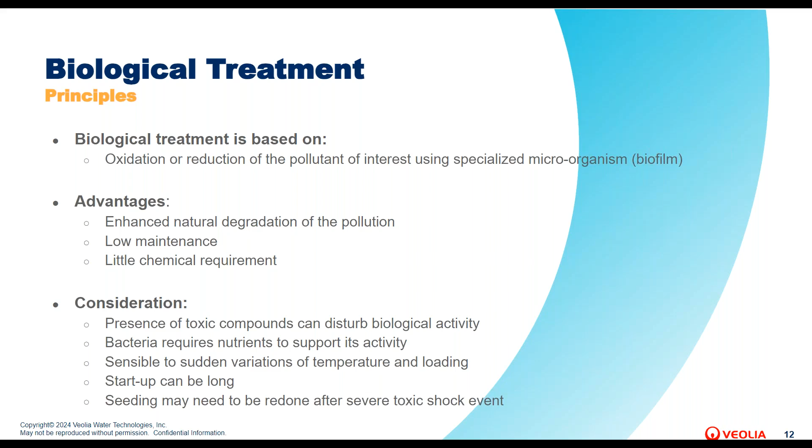There are several types of biological treatment. The most common being the activated sludge, where the biomass is in suspension in the water. These are the ones that we usually see in municipal application.

However, this presentation will cover the fixed film biomass in a moving bed biofilm reactor, or also called MBBR, where the biomass grows on carriers called media. So this process will rely on mixing to control the biomass in the system.

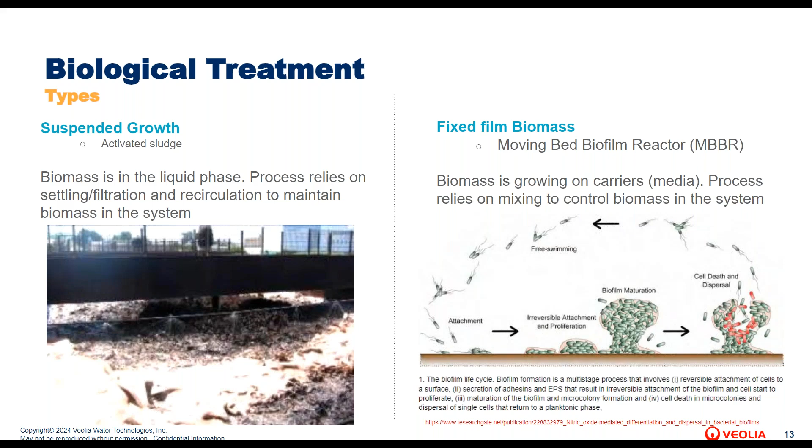Densification is a popular topic nowadays. The MBBR is a means of densification of the microorganism community into protected surfaces. It is like a safe space condo for bacteria in order to increase the population in smaller volume. This allows better tolerance on isolated toxicity events. It can tolerate also high hydraulic flow variation and TSS in the influent.

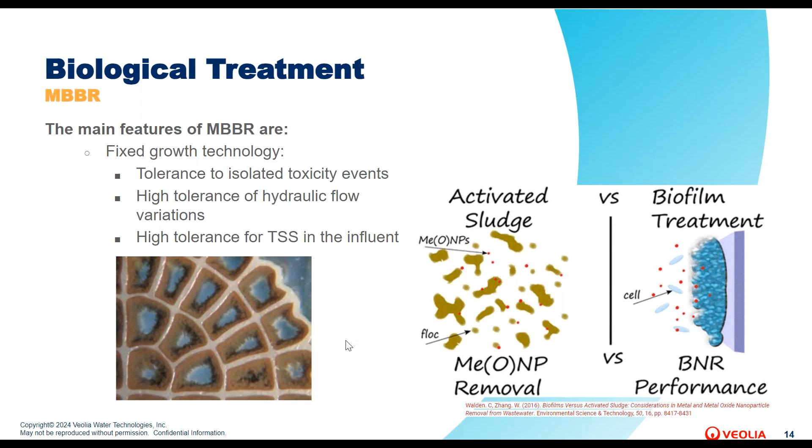So the MBBR consists of a tank filled with media, aeration grid connected to a compressor to diffuse air, or ensure mixing for aerobic reactor, or mechanical mixers for anoxic-anaerobic reactors. It also contains sieves to keep the media within the MBBR and instruments for monitoring.

The required volume will be defined by the pollution load, so flow times concentration and temperature. Typically, the minimum temperature of operation will dictate the design.

So the large protected surface gives really robustness to the biofilm in case of sudden increase of toxic compound. In mining application, we will use mostly painted steel field-erected tanks for big flow, big load, or we can also use FRP for low load application.

It is also an auto-cleaning process since the mixing with air or mechanical mixing will allow contact of the carriers and will promote the sloughing of the biomass.

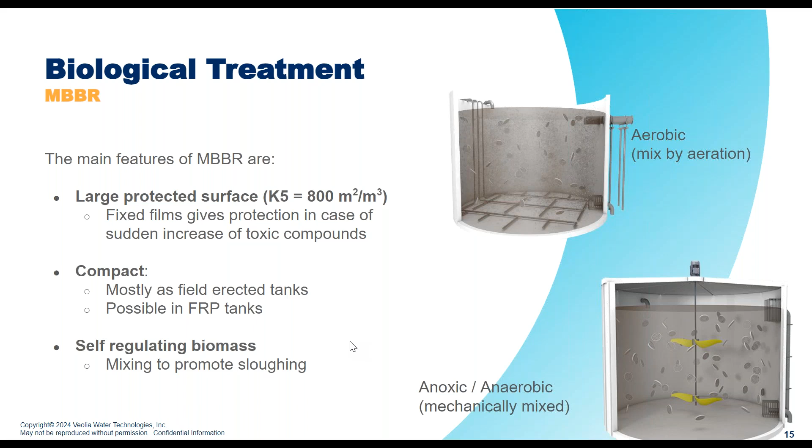Depending on the water characterization and criterion, the reactors can be installed in series to optimize the kinetics of each tank, and each tank will grow specialized microorganism population for the pollution to be treated. This helps to avoid competition between the bugs and optimize the design.

Also, to be noted, the biofilm can operate at low temperature down to 1 degree C, especially with mature biomass. As it is aging, the biomass is more and more efficient. The performance won't be the same after 3 months versus after 12 months. The kinetics will get better over time. So mature biomass will be more resistant and resilient. This is one of the main features of a fixed film bioreactor.

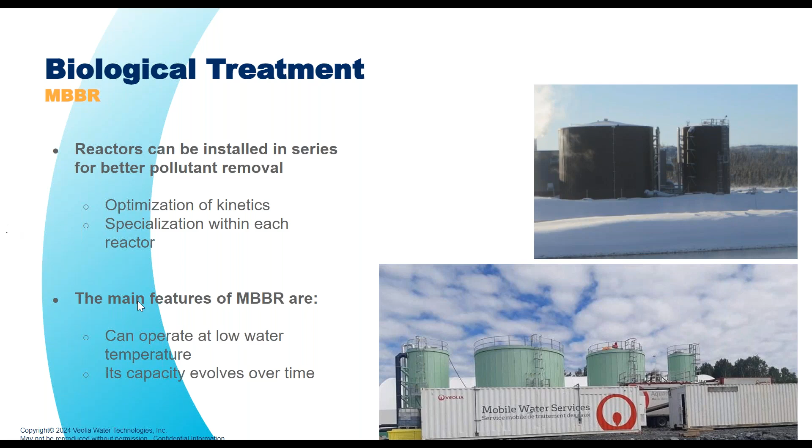Nature is well made, as life can occur at extreme conditions. This is why MBBRs can be installed for exotic applications. The specific wildlife can grow at high temperature. We have applications that can go up to 40, 42 degrees C to treat the pollution, while different wildlife will populate a reactor at lower temperature.

This is the same for pH. At low pH, we can develop bacteria that will reduce or oxidize thiosulfate, for example. As the population is different, the kinetic is different too, and the volumes need to be calculated accordingly.

Also, MBBR can work in saline environment or in high scaling potential application. So special attention needs to be done for these applications, and Veolia has developed the Media Z that is not affected by scaling. The Media Z will work even if there are scaling conditions where the typical media will sink.

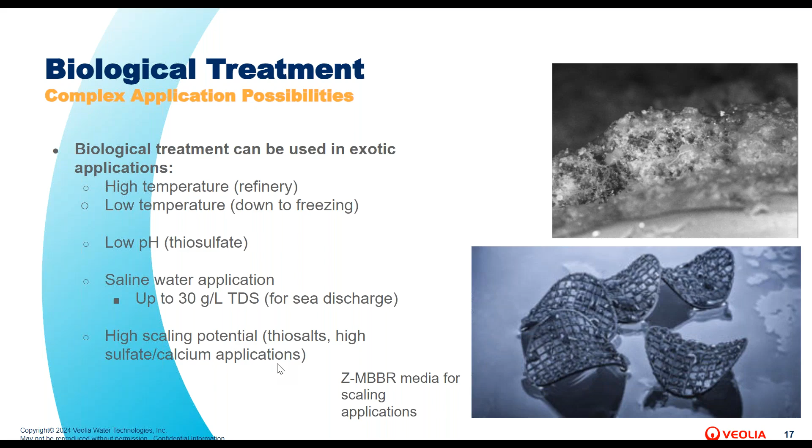When we are facing new application, we will like typically to test the equipment to make sure that this is a good application for the process. It takes about 4 to 6 months typically, and it can help also to establish a strategy to speed up the startup. We don't usually use bench scale tests for kinetic design.

We will go for pilot scale testing. So in that way, we can better appreciate the impact of water variability.

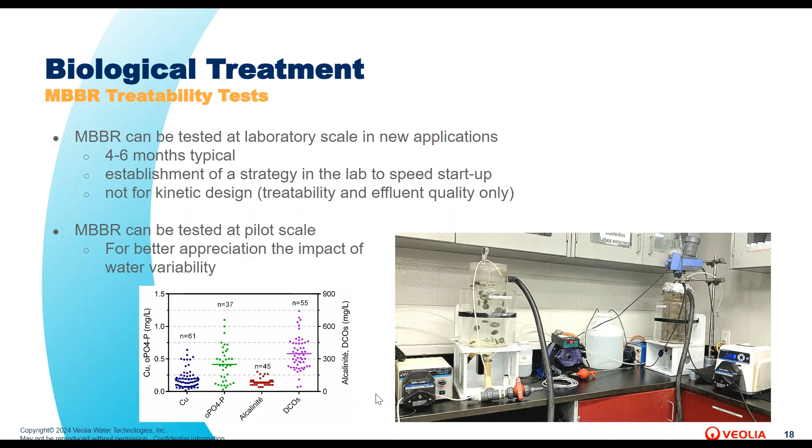So the biological treatment, MBBR, will shine when you have limited footprint, when you need to integrate it in complex solutions, when you expect to have high flow variations, or you need to manage load variation.

You can do that using heating because the kinetic will be faster at high temperature, or using recirculation if you have low load. You can also go with phasing, again using heating, or using different filling rate as the loading is increasing over time.

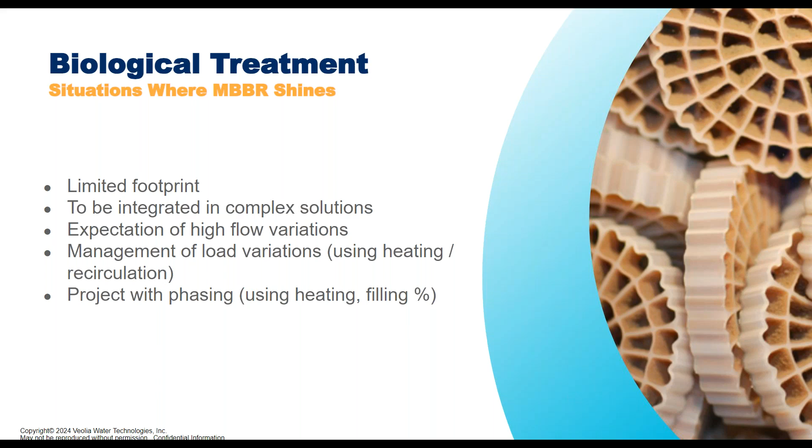What does it need to thrive? You need to have water access year-round, or you can also schedule downtime for extended periods with progressive startup. You need to get rid of every inhibitor that could affect the treatment, or do an adequate design, not too small but not too big, because you don't want the bugs to be starved.

They need to be fed. You need also to add some nutrients or reagents such as alkali for pH control, carbon source if you need to go to denitrification, ammonia, phosphorus source also to keep the C/N/P ratio optimal.

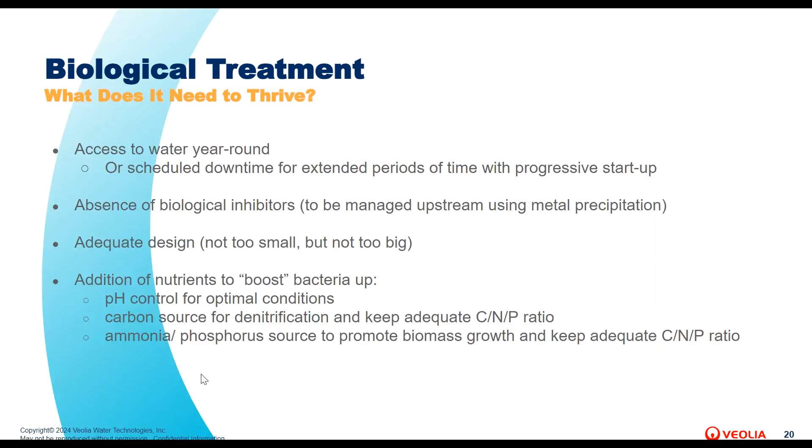To give more robustness to the system, we usually add a heating system. That can be done not only to prevent freezing, but also it helps if you have a sudden load increase to recover from a toxic shock. It will help also speed up the seeding phase and increase the MBBR capacity. We usually also use a heat exchanger for heat recovery and OPEX reduction.

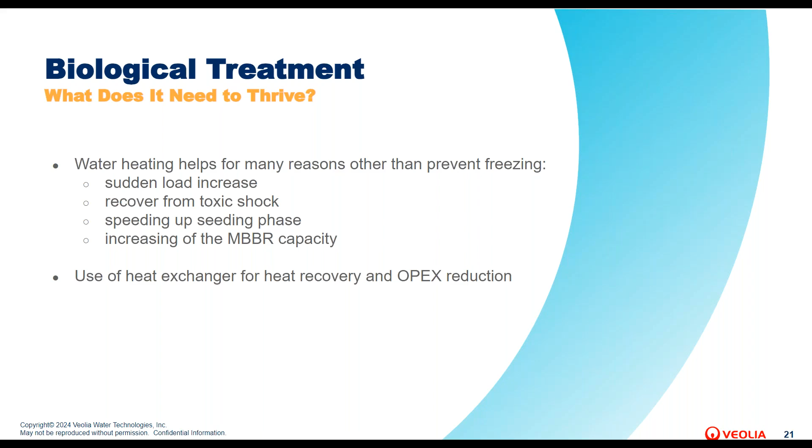Toxicity. Toxicity is a complex concept and can be driven by many factors. Also, the tested species won't be sensitive to the same pollutant, so the solution needs to be global. In the next slide, I will present a few elements that can bring toxicity and that can be treated using the MBBR system.

In a mining site, especially for gold and silver, they will use cyanide in their lixiviation process for gold and silver concentration. Of course, cyanide is highly toxic and needs to be treated. So usually the mining will have a detoxification treatment based on chemical oxidation, such as INCO or other oxidation processes. This will transfer the cyanide into cyanate.

The cyanide can also be treated biologically through aerobic biological treatment at neutral pH, and again the end product is still the cyanate. It needs also to be noted that when you convert the cyanide into cyanate, and if you discharge that into a pond, yes, you will have natural degradation in the pond because of UV light. But the cyanate will still be converted into ammonia, which can be also toxic, and to nitrate.

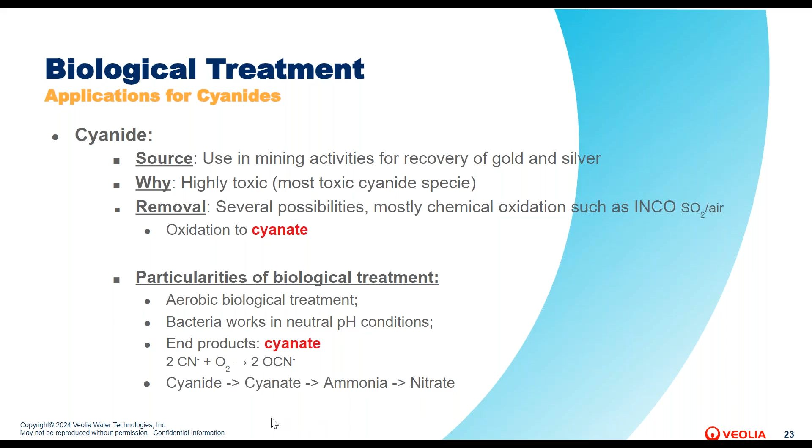Nature always takes the shorter path that requires the least energy. Cyanide species require less energy to degrade than ammonia. It's like candies to bugs - they will prefer cyanide species over ammonia. So that's why you better want to remove any cyanide species prior to going into a nitrification process.

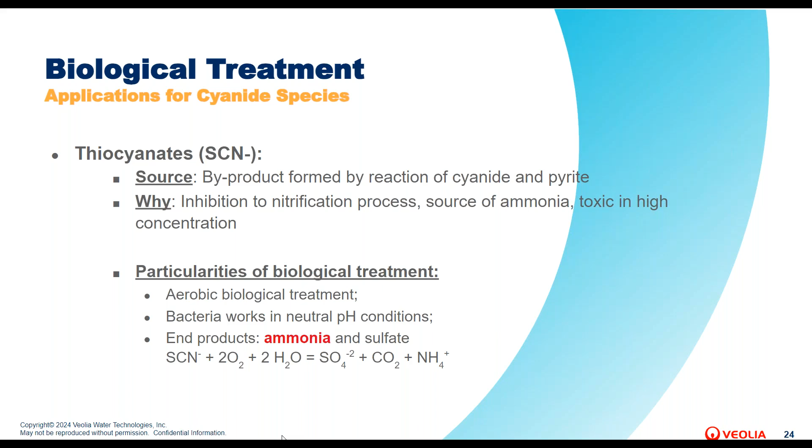Thiocyanate is a byproduct from the reaction of cyanide and pyrite. If your ore contains pyrite, you will produce some thiocyanate. And this, again, will inhibit your nitrification process and will degrade into ammonia if you want to degrade it naturally with light. The thiocyanate is easily biodegradable in the MBBR. The oxidation is really quick and the acclimatization is really, really rapid, and it will produce some ammonia and sulfate at the end.

So cyanate is similar to thiocyanate. The only thing is that the hydrolysis is slower. The kinetics will increase over time, so it will take a couple of months to grow the appropriate microorganisms to treat for cyanate. So it's normal to see that the treatment is slower. The end product again is ammonia and bicarbonates.

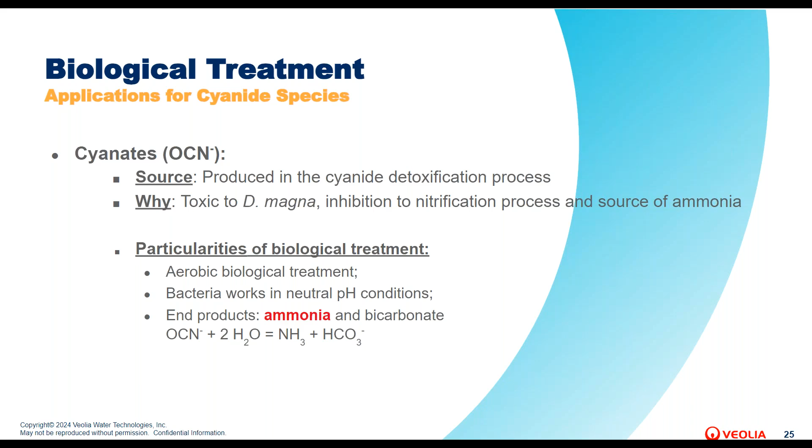Biological treatment can also treat for thiosalts, which can be produced if you process sulfide ores or if you have an acid mine drainage issue. Thiosalts are really difficult to treat. They cannot be easily precipitated, but they are highly biodegradable at lower pH through an aerobic biological treatment. However, you really need to be careful - if the water contains some calcium, you may have a scaling issue, so you really need to do the design accordingly.

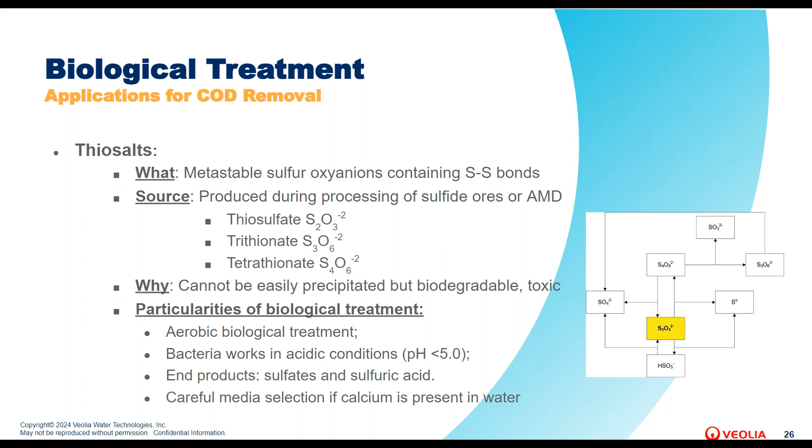Organic acids like citric acid or ascorbic acid are not really harmful for aquatic life. However, if you have citric acid or ascorbic acid, mainly coming from the CIP cleaning in membrane technology, you want to get rid of these chemicals because they can really affect chemical precipitation. It's a chelatant, so it will affect coagulation, any chemical precipitation. It's easily biodegradable within an aerobic system. Again, bacteria work in neutral conditions. So if you have MBBR to degrade these organic acids, you are buying yourself peace of mind if you have physicochemical treatment on site.

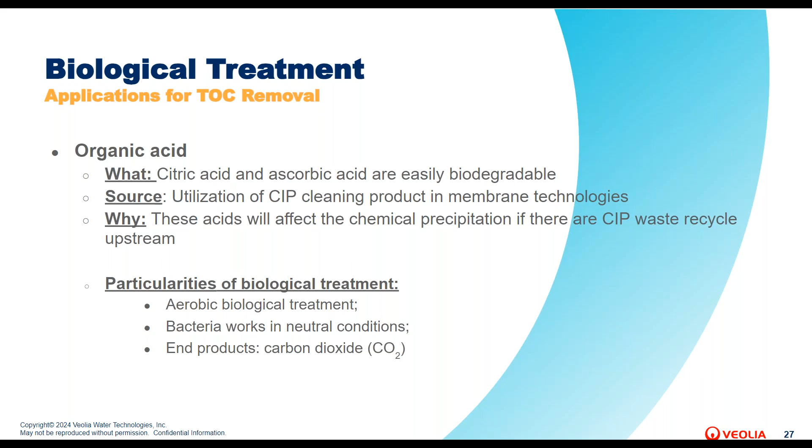Now, what about nitrogen removal? Ammonia is really toxic, mainly for trout, in its unionized form. So you really need to get rid of that. It will damage the gills, the tissues, and produce hemorrhaging in the trout.

You need to treat for nitrogen. For nitrate, there is usually no issue - there is no criterion on nitrate. However, it can cause eutrophication and reduce the dissolved oxygen of your receiving body, so some clients or some regulators ask to treat for nitrate.

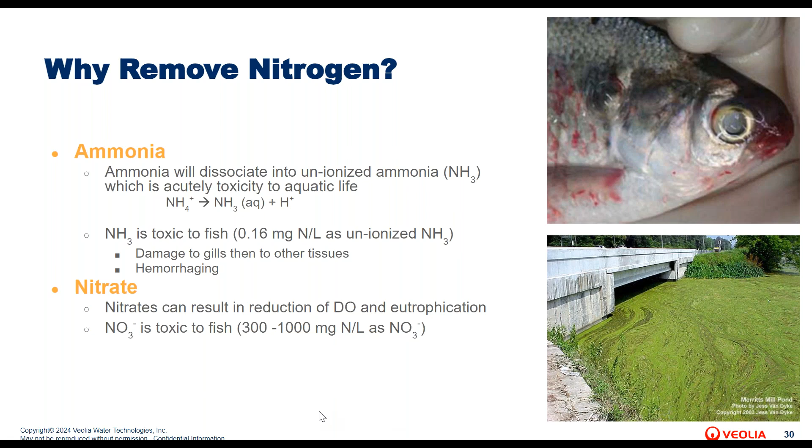So the main mechanism for ammonia removal is nitrification. You want to treat ammonia and it will be converted first into nitrite and then into nitrate. It's a mechanism that actually works in series.

However, note that it's easier to treat ammonia to nitrite than nitrite to nitrate. So when you do the startup or have an upset condition, it's not unusual to see nitrite spikes that go down after some days when the microorganisms develop to treat the nitrite.

The end product of the ammonia oxidation is nitrate, and also acidification. So you produce hydrogen ions, and to get rid of that you need to dose some alkalinity in the system. Also regarding nutrients, you need to put some phosphorus in that kind of process. However, there is no need to add any carbon because these are autotrophic bacteria, and autotrophic bacteria synthesize their own food with the inorganic carbon present in nature.

As for the nitrate, this is an anoxic biological treatment. The microorganisms will use the oxygen from the nitrate as oxygen, so we don't need to inject free oxygen. We need to ensure mixing through mechanical mixing. The end products are nitrogen and CO2 gas.

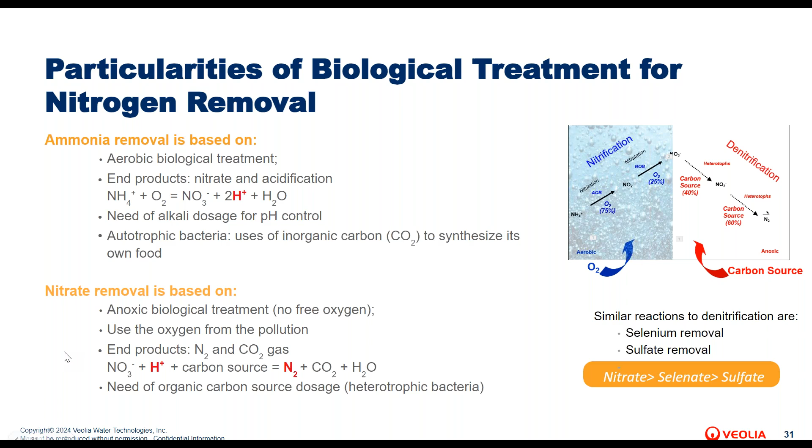So now we will go through a case study. This is a Canadian gold mine, a large gold mine in northern Quebec.

At first we built the plant in 2013, and it was only to remove metals - zinc, copper and arsenic mainly. But after the startup, they saw that the effluent became toxic. So removing metals only was not enough to remove the toxicity. The mine got ordered to stop the toxicity, and they needed to come up with a solution to treat that.

So at first, the first stage to design a biological treatment, an MBBR, is to define what is the load of pollutants to be treated. For this specific project, it was not that easy because the plant was running in a loop for several years, so it was really difficult to define the load.

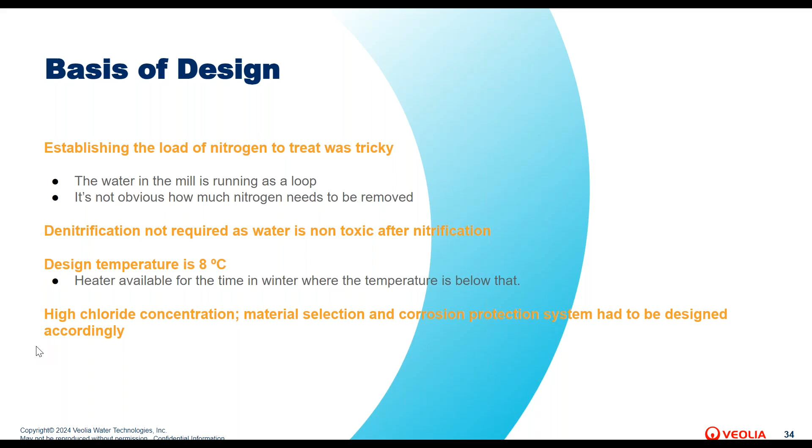In the square image, this was the original plant, and the MBBR tanks are all on the left. At first we had only the MBBR for nitrification and cyanide compound oxidation, but we kept some room for future expansion in case additional nitrification was required at the plant.

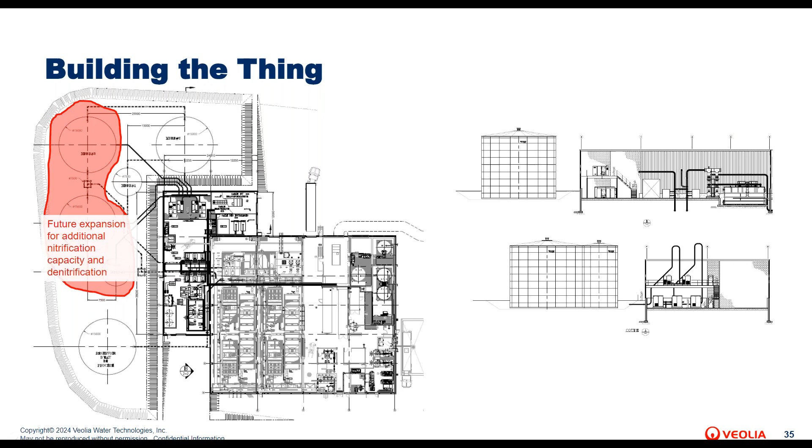So this is some pictures of the installation. This is actually the starter ring that was anchored to the foundations.

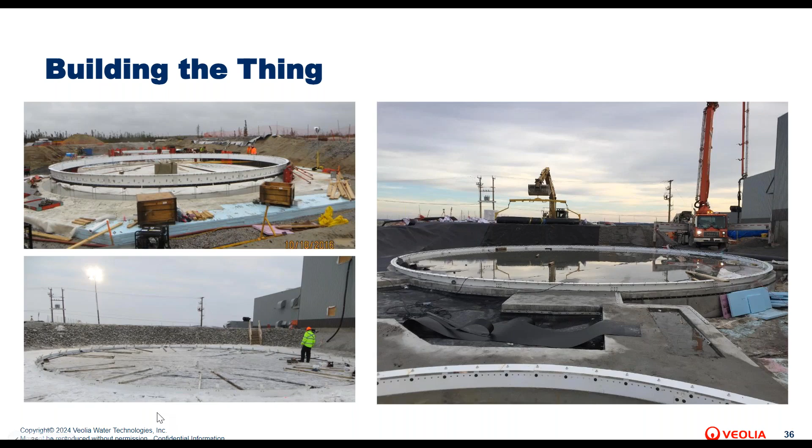And again, this is during the installation. The way it's installed is that they begin with the top ring of the tank and attach it to a hydraulic screw jack system. The sidewall sheets are added from ground level until the ring is complete. The ring is then raised with the jacks and the next ring down is added. So this is the way they are building the tank.

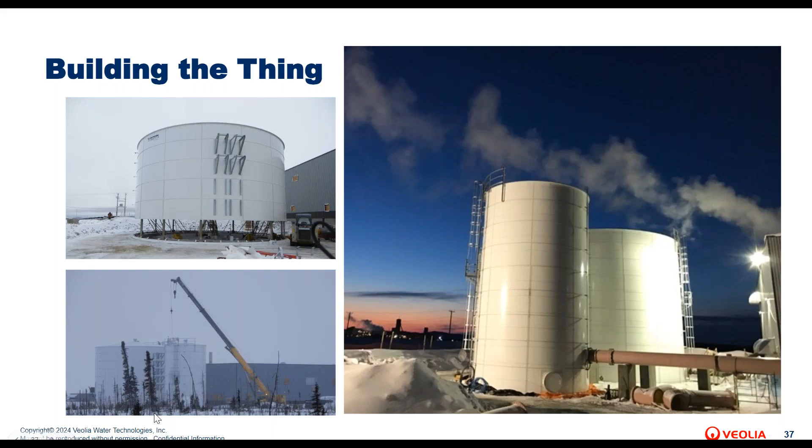So this is some results after a bit more than 2 years of operation. When we analyze the loading, we really see that the treated load increased with time, and it continued to increase for months.

Also, you need to note that the system was actually designed to treat 450 kilograms per day of nitrogen, but actually it was able to treat 130% of the design. This really shows how robust that kind of system can be. The average load was 50% of the design.

This shows that when you design a biological system, it's not advisable to put too much security factor into the design. You don't want too big a system, and we know it will get better with time. So this is really the conclusion of the loading.

Regarding temperature, the first winter operated at 8 degrees C because below that they were getting poor results, so they were using the heating system extensively. However, in subsequent winters, they operated at 4 degrees C. They could have gone lower, but were limited by freezing since the pipe was not heat traced. So the temperature was limited at 4 degrees C for this specific site.

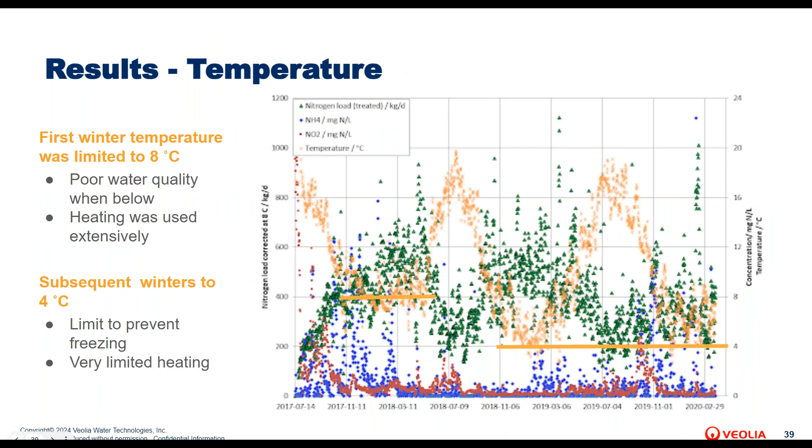So what we can see is that the treated loading increases with time. The juvenile microorganism won't be able to treat as much load or pollution as a mature biofilm. So as you're seeding the system, as it grows, it will become more performant, and it will be able to eat more pollution in a certain amount of time.